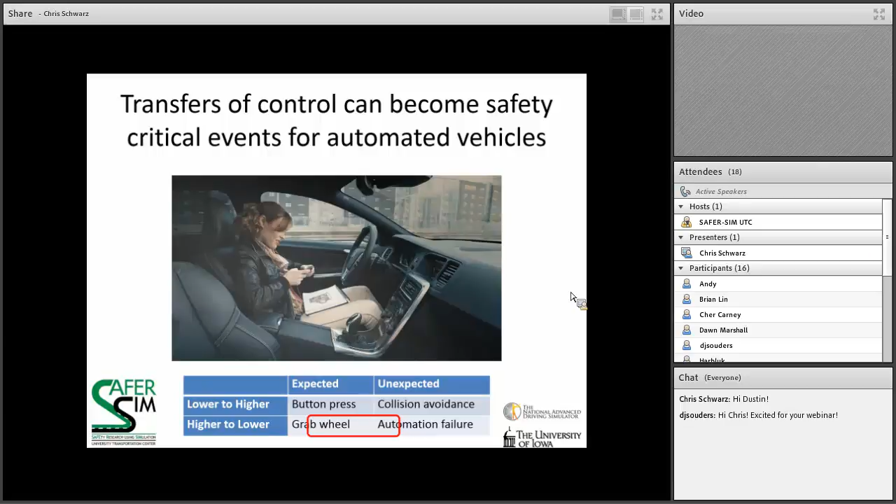It doesn't go back to an automation system, which would happen in level 4. In level 4, the automation would be expected to safely pull over or slow down or do something appropriate. In level 3 and in this study, it was really the driver who needed to take control and respond to a situation if he or she was asked to.

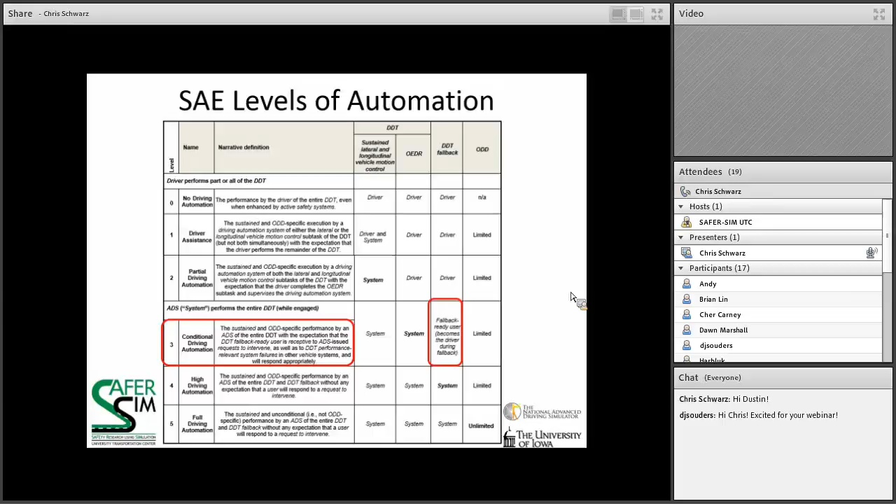When did they choose to begin a transfer of control? How long did it take? How long did it take to return control to the automation after the event? How long did it take the driver to really stabilize the vehicle after a transfer of control and return their attention to the road? Were there any performance decrements associated with transfers? And were there any differences in the gender and age groups, either in their trust or their driving performance?

So that's a lot to chew on. And if it feels like this is kind of an ambitious project, it's because there was an exploratory aspect to this study.

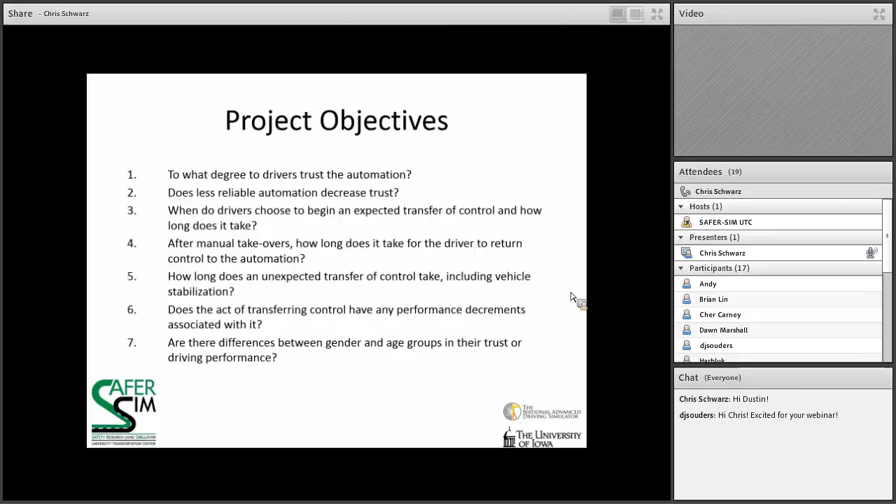Part of the reason for that is it's really the first NADS-1 simulator study that we've done with automated vehicle technology and giving drivers exposure to that. So there was an exploratory nature to it, and we were kind of curious to see what would come out of it. And some of it was inspired by previous work in this area that I'll mention during the talk. And so, all right.

We had 5 main events during the drive. 4 of them were events that had to be responded to either by the driver or by the automation for the drive to continue. And then the 5th was a normal exiting the highway at the end of the person's drive. So a work zone, missing lane lines, sharp curve. Really, it was an elevated exit ramp that had little walls on it. It was a fairly sharp curve, a slow lead vehicle, and then exiting the highway.

Now, in the condition that had more capable automation, it did not issue takeover requests for several of these. Rather, it just did what it needed to do, changed lanes or kept on going through the missing lane lines, for instance. And in the slow lead vehicle, it issued a 10-second takeover request, and in the exiting the highway, it issued a 30-second takeover request. In the less capable condition, each event issued takeover requests, and the slow lead vehicle was more critical with only a 5-second warning.

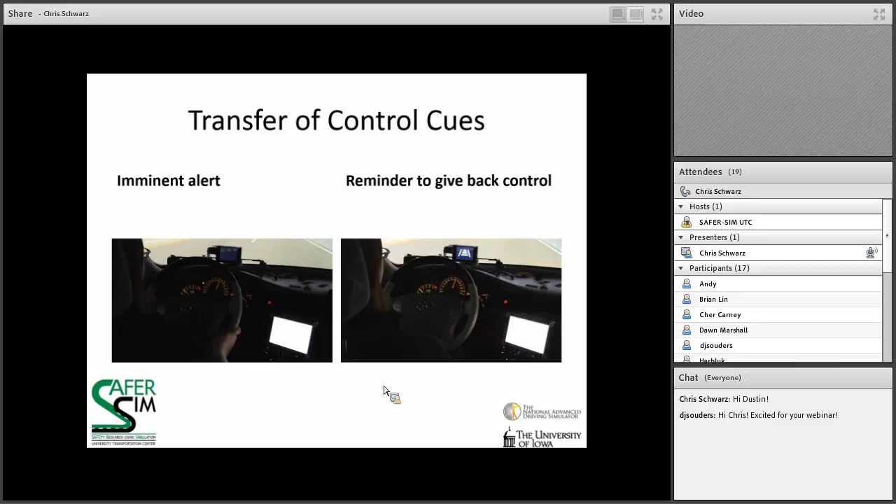All right. The apparatus was the NADS-1. If you're not familiar, it's a large motion-based full motion simulator with a full vehicle cab in it, 360-degree surround visuals. The motion base is about 20 meters by 20 meters. So you're really able to do some good turning and braking in it. As well, it has vertical vibration.

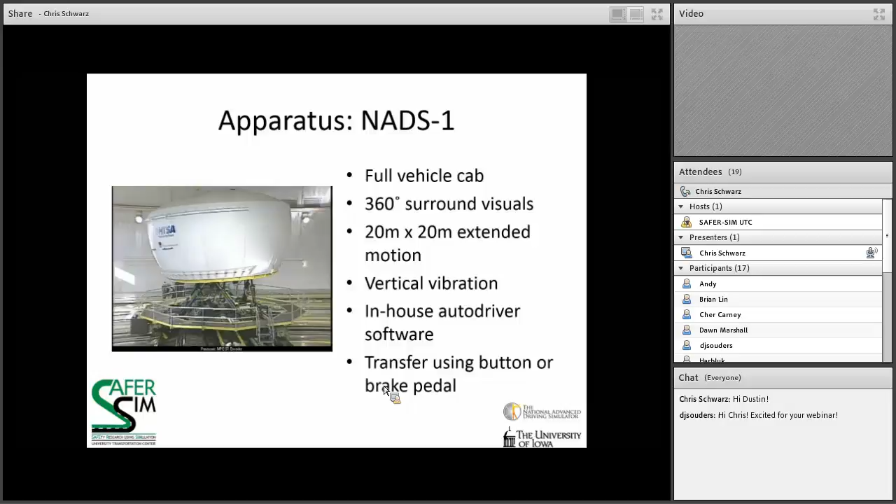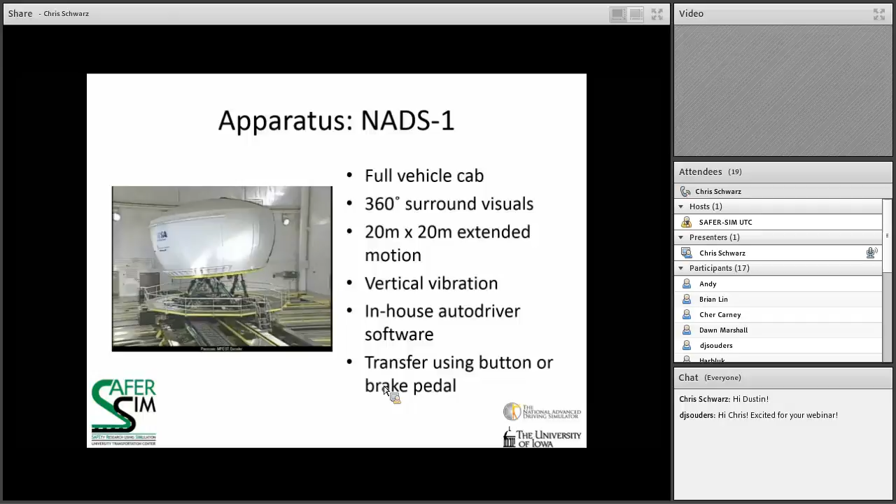We developed software in-house to do automated driving control that was capable of doing lane changes, exiting highways, merging onto highways, doing turns, slowing down at a stop line. And you've already seen how we did transfer of control. We had that button on the steering wheel, and you could press the brake pedal.

The task was a trivia game that they could access from the iPad. And they had a choice to do any category they wanted. So the hope was that the level of interest in the task was similar across the subject pool. And the task itself, of course, was fixed. So we really wanted to try to standardize the level of engagement and workload as much as we could.

It's important to realize that this is not a secondary task for these drivers. Once they put the car into automated mode, it becomes their primary task. And paying attention to the road is then a distraction to them.

Okay, some of the measures and analysis techniques that we used in this study. Our independent measures were the order in which we presented the two types of automation. They had two study drives or two scenarios that they experienced. And each one had the same events in different orders, and it had a different capability of automation. And as well, we controlled for gender and age.

And then we looked at several dependent measures, including the duration of the event and how long they spent in manual control, response times for them to take over, take back control, and then give control back to the automation. We looked at their gaze and measured the PRC, the percent road-centered gaze, which is just the percentage of time they spent looking at the road.

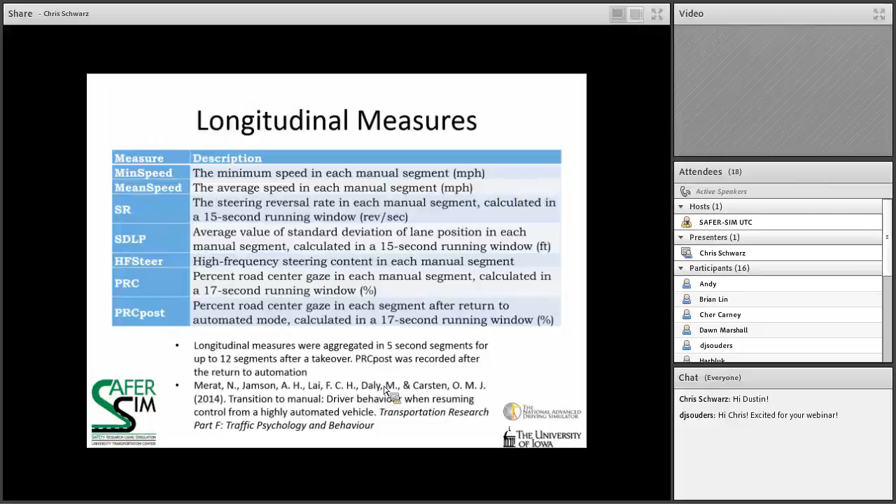We looked at speed, steering reversals, SDLP, high frequency steering, and the PRC gaze. And then we also looked at the PRC gaze after they gave control back to the automation. So we were able to see how quickly drivers went back to their trivia task.

We used SAS to analyze the post-drive survey data. We used R for everything else that was in the simulator data. We ran ANOVAs for several of these, applying Box-Cox transformations where appropriate to achieve a normal distribution of the residuals. And then we made extensive use of linear mixed effects regression. And we used the lme4 package in R, which was really great.

And the interesting thing that we did was when you use time as a factor in the mixed effects regression, then you get what's known as a growth curve analysis. And you can do some really clever things, treating time linearly or quadratically or polynomially. And I'll show you in the results what you actually see when you do that.

In terms of accuracy measures on the linear mixed effects regression, well, the relative accuracy is traditionally done by something like an AIC or a BIC, and we reported both of those in the report. Absolute accuracy, you might normally turn to p-values, but the lme4 toolbox doesn't report p-values, which may be problematic to some people. Instead, I used another approach that is documented in the report.

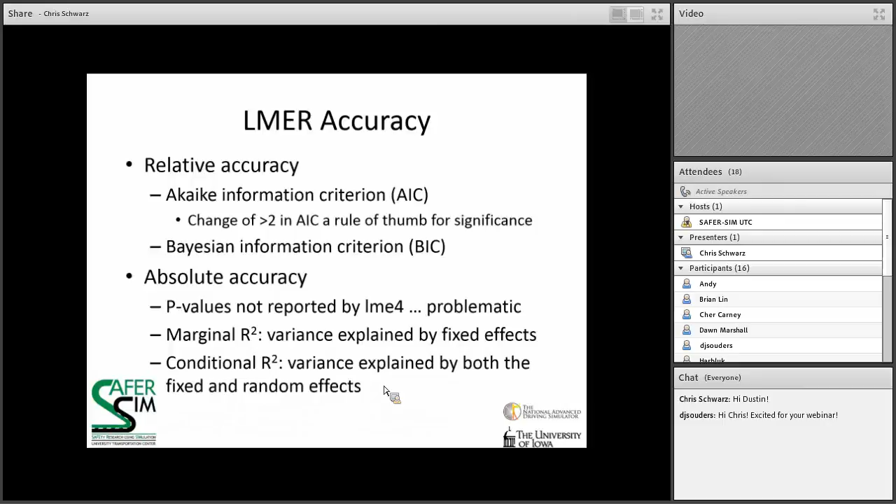You can estimate marginal R-squared values that explain the fixed effects, and then conditional R-squared values that explain the combination of the fixed and random effects. So that's what's reported in the results. But don't worry, I'm not going to show you tables and tables of numbers today.

So here's some results on trust, and I'm going to show you a little video of the Likert survey. I'm going to try. There we go.

So you can see that survey was placed near the center console. It is not that high. So really, if they're involved in their trivia task while they're doing this, there's no need to even look up at the road. They can just glance over at the screen, press their response, and go back to what they were doing.

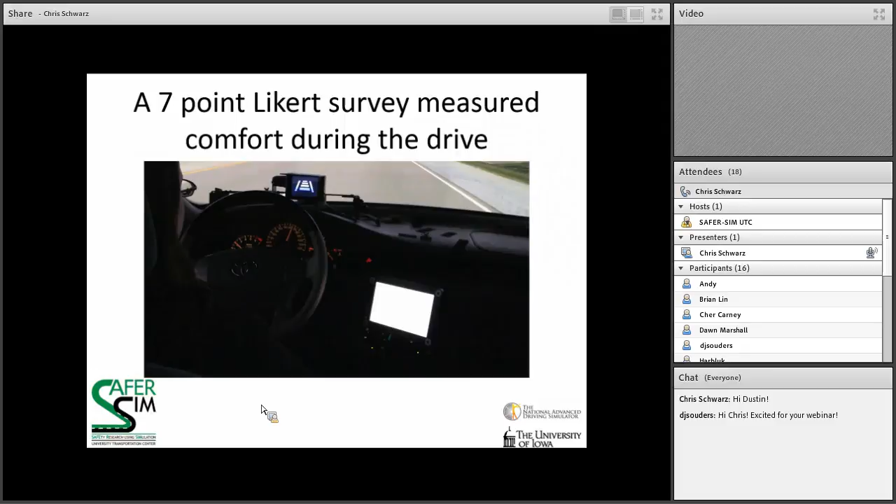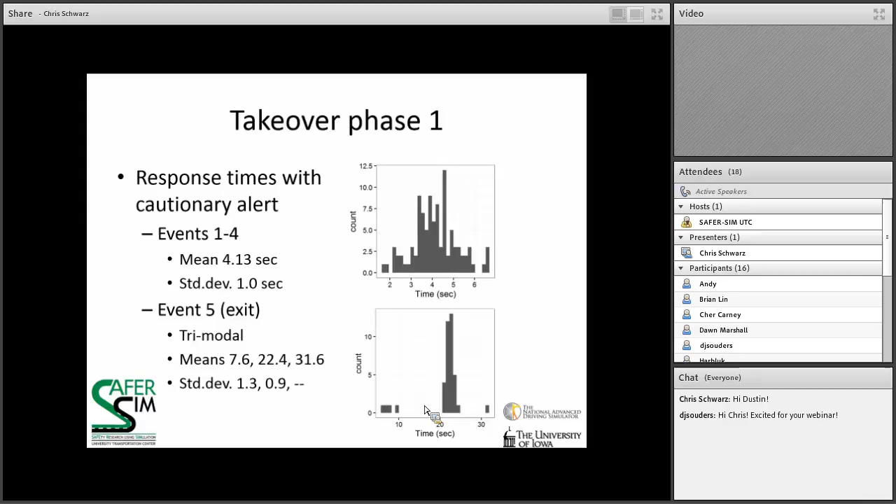It was thought in that work that perhaps one of the reasons that people were waiting into the second stage was that their takeover request actually had a countdown where it would count down literally to the time of the next stage. And ours did not, but we still have this trimodal distribution here. It's kind of interesting. This also echoes, I think, previous work that shows that people can take over really fairly quickly. And if there were a safety critical event that they really had to respond to, people could probably take over even faster.

But looking at phase 2, where people then have to take control of the vehicle and stabilize it, we looked at SDLP and this high frequency steering measure. And the interesting thing here is that you can see in the first 6 segments of time, this is a longitudinal measure. So each instance at the bottom is a 5-second period of time.

Can you give me some water?

And this is showing that really for about 30 seconds, and this is aggregated across all subjects. So you're going to see individual differences, but really for up to the first 30 seconds after you take back control, the standard error was quite a bit broader. And I think that's kind of interesting.

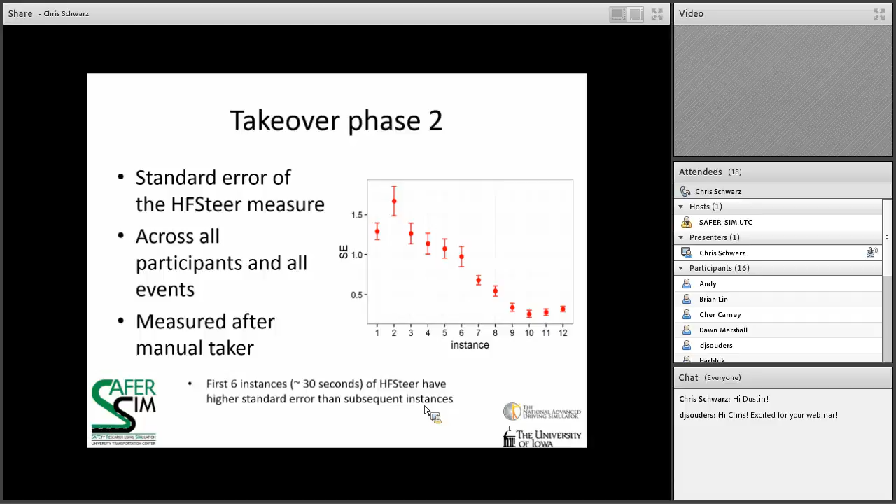And then takeover phase 3 had to do with visual attention and the percent road center gaze. And what actually happened is that some people's gaze never really returned to normal after a manual takeover. So we fit a line to the trend as it was increasing and extrapolated if we needed to find the time that PRC would reach 70%, which is about in the normal range. PRC, if it goes too high, like 85, 90%, then you're actually in the range where we associate that with some cognitive distraction, gaze concentration. So 70% is about right.

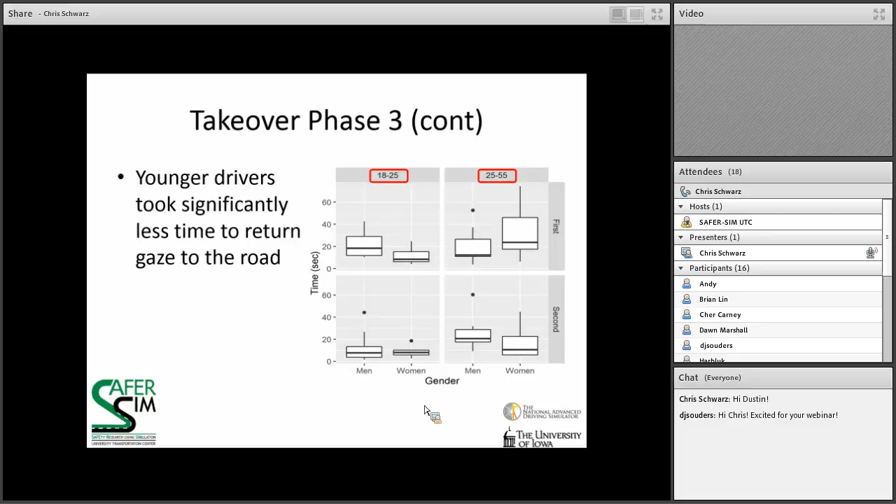And so we're seeing some numbers that go, you know, up to 20, even up to 40 seconds. There was a result here where we can see that younger drivers took significantly less time to return their gaze to the road. So they were able to switch their context more quickly from the task back to the driving.

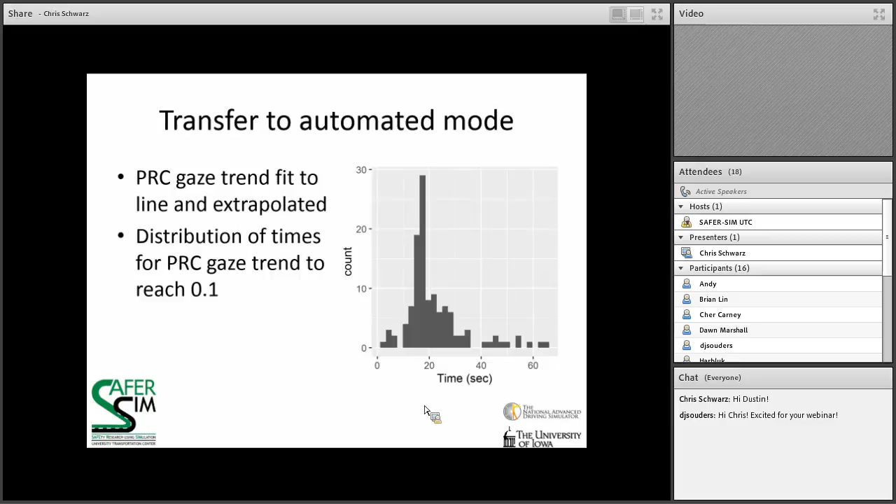And then returning back to automated mode, we did exactly the same thing, only we were looking for the time it took the PRC to drop to 10%. And here again, younger drivers took much less time to switch back from driving to the trivia task. And interestingly, older females took the longest to reallocate their attention, but only on the first drive. They adapted after that. And in their second drive, they took much less time.

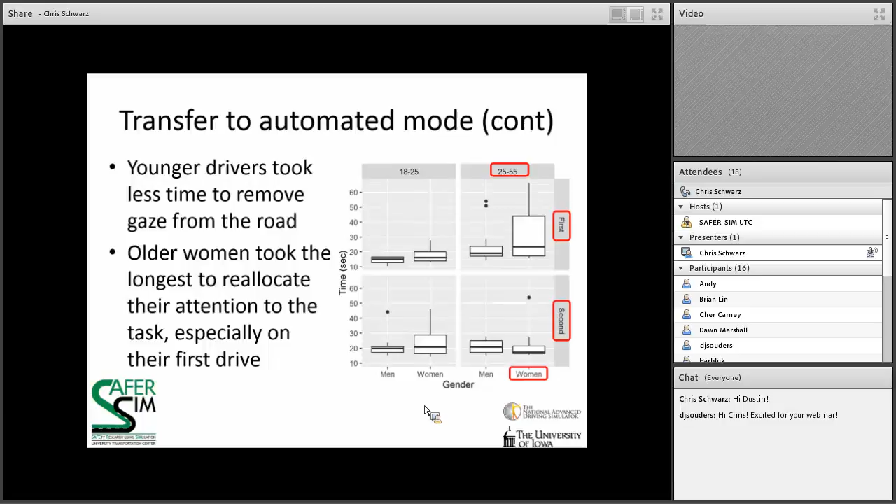I'm going to spend the remainder of the results slides on focusing on the lead vehicle event. In the report, you'll also find some results on some of the other events, but I think the remarkable thing is that the lead vehicle event really had quite a few results associated with it. Perhaps because it was maybe the closest thing we had to a safety critical event, where you were coming up on this truck that was driving at about 25 miles an hour. And it was the one where, in the less capable condition, we issued only a 5-second takeover request.

So, first of all, time spent in manual mode. This is the time from when they took back control to the time that they gave control back to the automation. In the condition with the less capable automation, so that would be the one where they had the 5-second takeover request, there was a difference in age, and there was also a difference in gender that we saw. Younger drivers spent much less time in manual mode than the older age group. I say older, but it's 25 to 55, so I'm getting up on the high end of that. Men spent less time in manual mode than women did. So some of the interesting results that we got out of this study really had to do with gender and age differences.

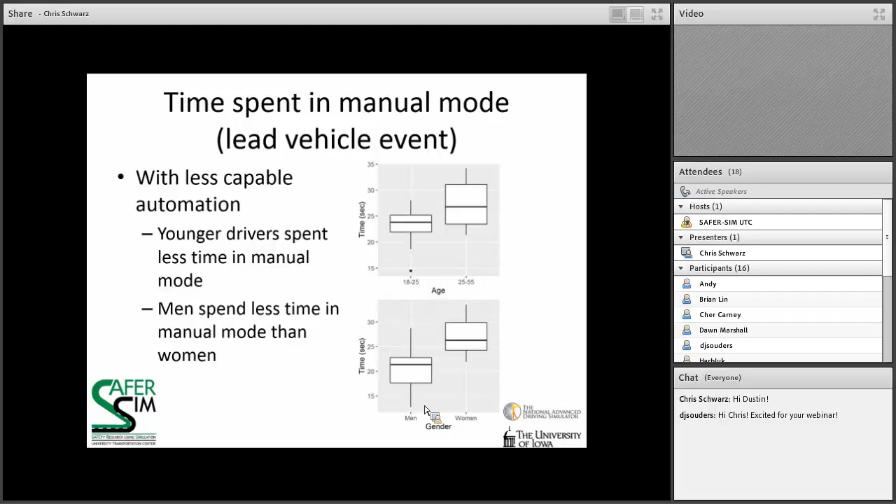Minimum speed. This is the first slide that shows some of the results from the linear mixed effects regression. So let me take just a moment to explain what's going on. On the left, you're seeing a caterpillar plot that shows confidence intervals associated with each term of the mixed effects regression. So if it were purely a linear fit, there would be an intercept and a slope, basically. But this was a little bit more complicated. I believe I did polynomial time for all of these, so time itself could have a linear component and a quadratic component. So the fit over on the right, if you look at the red lines with the gray bars as the confidence region about those lines, you're seeing the fixed effects polynomial time, so it can look quadratic or it can look linear.

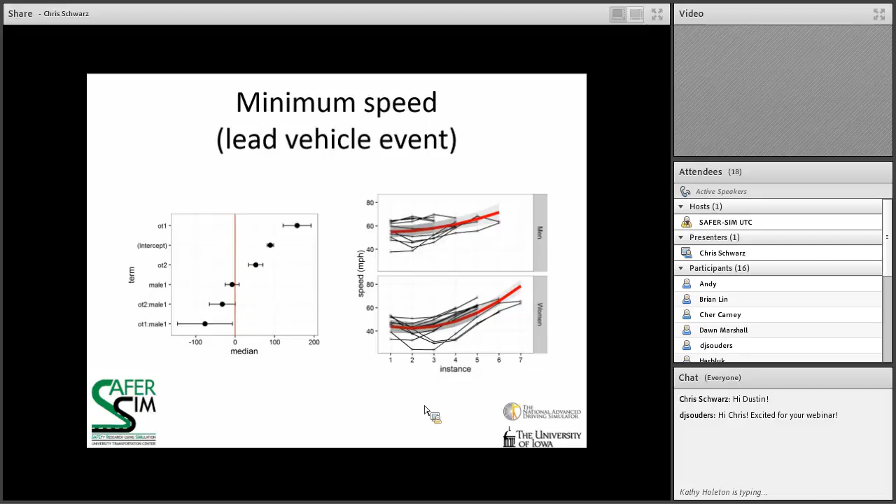And the differences in those red lines are the differences between the two groups. Back over to the left, what you're looking for is the confidence intervals to be outside of 0 and not include the red line at 0. And if that's the case, then you can surmise some kind of significance. And because we see that with gender, I'm showing the differences between the gender groups on the right. And indeed, you can see that the women had a lower minimum speed, quite a bit lower on average than the men did in that event.

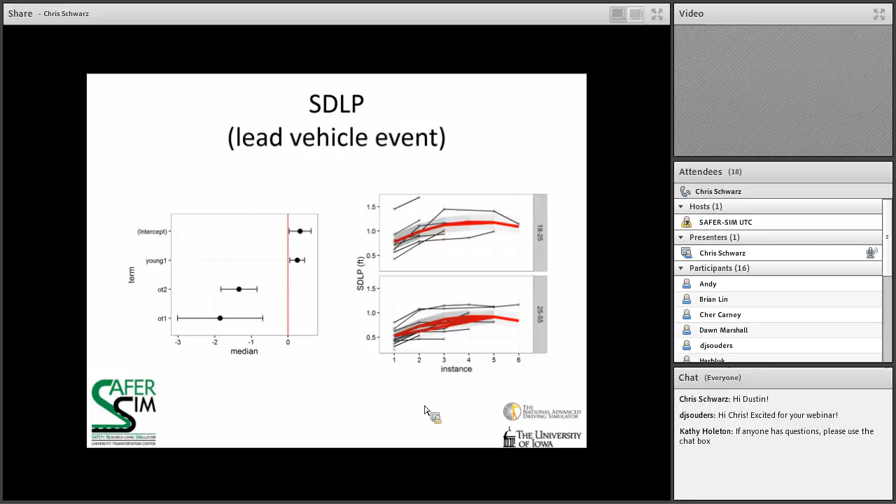And then this result is interesting in that it's focused on the first drive versus the second drive. It's not a result on age or gender. And there were other results like this that I'm not showing you, but you can find them in the report. So this is showing that in the first drive, the high frequency steering has more of this linear look to it, and perhaps is, well, it's a little hard to tell because you can see that there are a couple of people who might be considered outliers. And if you took those two folks out, then that might make the behavior look more similar.

But on average, there's quite a bit of a difference in how people steered during the first drive as compared to the second drive, which would suggest a link to the change in comfort as they became familiar with the system. So it wasn't necessarily associated with the capability of the automation, because some got one and some got the other. And it wasn't necessarily linked to the order that those were presented, just merely by virtue of the fact that it's their first drive or their second drive.

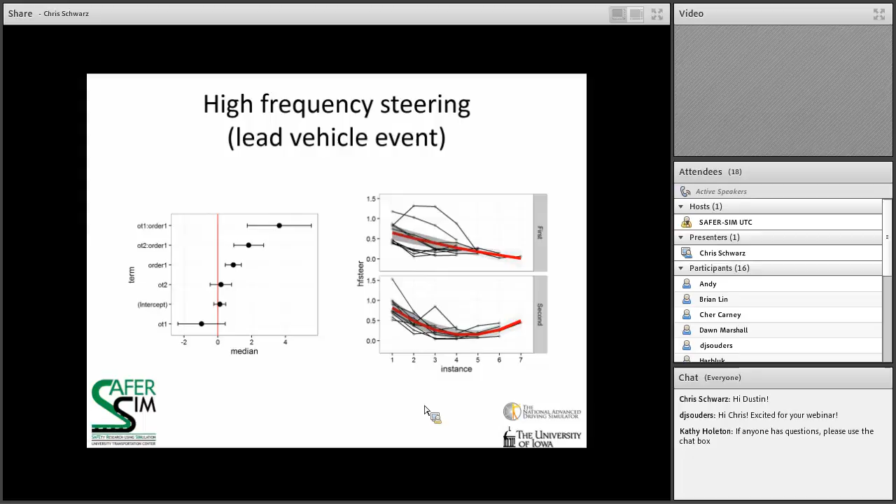All right, let me conclude and then we can move on to some questions. So, again, excuse me, one moment.

We considered trust through the fairly narrow window of comfort, because we surmised that comfort would be a good indicator of a driver's nascent trust in a system that was unfamiliar to them, as this system certainly was. The first thing that you have to do is become comfortable with the system as you learn it. Beyond that, you can start to learn more about the system and its limitations and develop a good mental model of it.

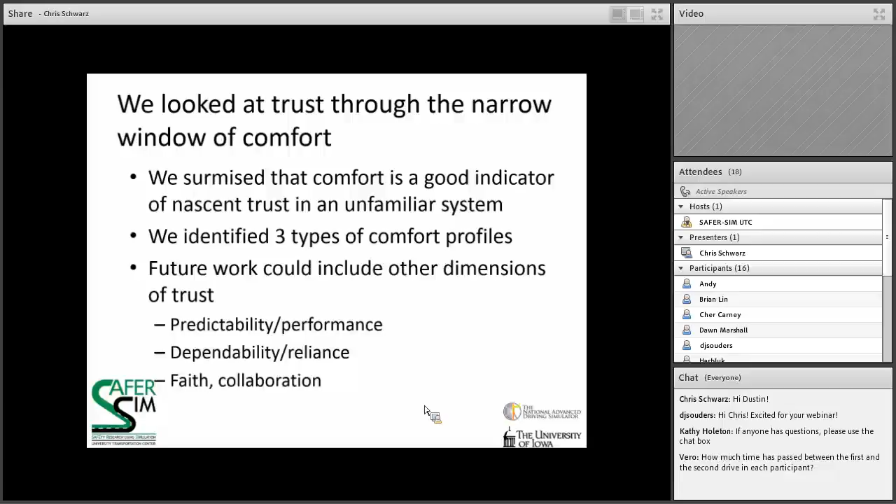But really, I don't think that we gave drivers enough time to do all of that. We did give them enough time, though, to become comfortable with the system. We identified 3 types of comfort profiles. And what we can do now in future work is to start to bring in other dimensions of trust. Some of these have been documented in other work: things like predictability and performance, or dependability and reliance, faith in the automation, and collaboration with the automation. These are all aspects of trust.

So we varied reliability by giving people 2 different capabilities of the automation and having it change on them from the first drive to the second drive. But it was interesting that we don't have many results that show an effect of changing the capability of the automation. We did see some results that show that the first drive is different than the second drive. And so one of the reasons that maybe we didn't see as much of an effect of changing the capability of the automation was that they weren't all that different.

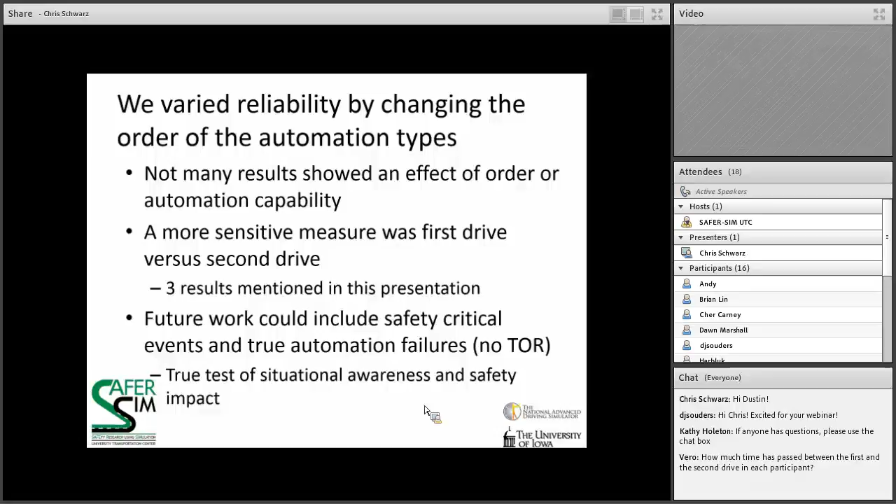And we didn't put people in truly critical situations either. So one of the things that we could have done was to introduce more safety critical events. We could have also introduced what I would consider true automation failures. In a real failure, you would have a situation where you need to intervene, but the automation isn't even on top of things enough to issue a takeover request. So you have to notice it yourself and take over control. That, to me, would be a real failure of the automation, and it would be a true test of that driver's situational awareness. But we didn't go to that extent in this study.

Now, we did see that takeover timing was quite a bit different. There was individual variation that you could see in the distribution, but it varied greatly by phase, where physical takeovers would take about 4 seconds. The high frequency steering would show a period of stabilization after takeovers, and then visual attention would have to return to normal. Now, the concerning thing about all this is that phase 2 and phase 3 happened after the takeover. So the driver had control and then needed to complete the process of regaining their situational awareness.

And so that's why one of our conclusions from this work, and it echoes previous studies that have been done, is that there's a window of time after a physical takeover where we would surmise that drivers might be at higher risk, because they're still in the process of stabilizing and regaining their situational awareness.

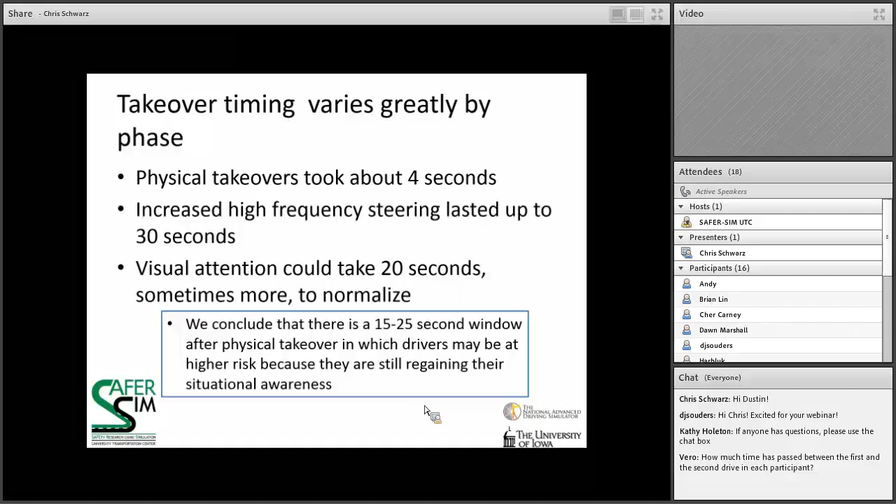So there are several open questions that remain that we would love to take a look at in future research. One would be: we've identified this vulnerable window of time after takeovers, but really, what's the safety impact of that? Just because I'm showing you that the high frequency steering is greater for up to 30 seconds, what does that mean in terms of safety? The answer is I don't really know yet. How do other dimensions of trust factor into drivers' expectations about the automation and their responses?

Why didn't we see more effects of varying the automation capability? And how much would we have had to change it in order to see an effect? I don't know the answer to that right now. And how could we use some of these results to design an automation system that would quickly engender trust, that could perhaps use information from a driver monitoring system to design an effective HMI? So there are all kinds of interesting questions.

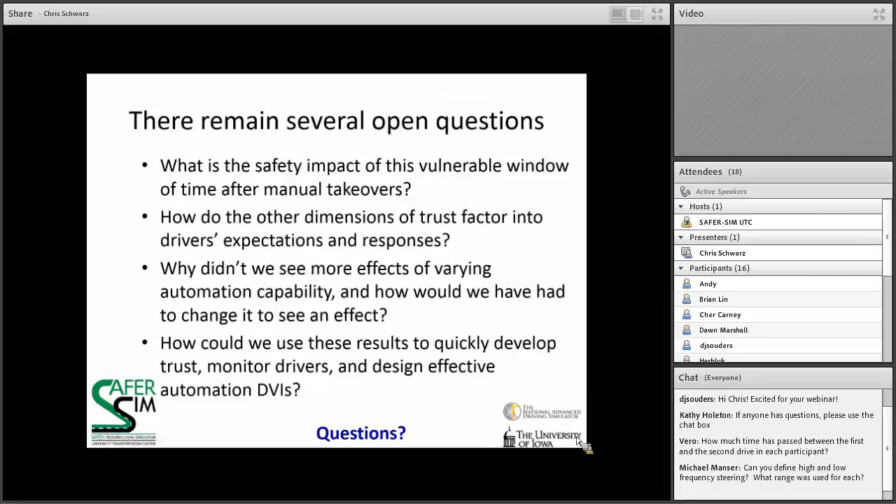And I have seen some questions flow through the chat, so let me bring up that chat and see if I can address some of those. Do I have to escape? Yep. Okay. Okay.

Can you define high and low frequency steering? Yes, I will do my best. That measure was also adapted from the Leeds work, the 2014 paper from Natasha. And basically, you're looking at two frequency bands of steering. The low frequency is, I'm not sure if I'll remember the numbers, but it's maybe 0.3 to 0.6 hertz or something. And the high frequency band is 0.6 to 1.5 maybe.

Again, I might be wrong on the numbers, but you can use a power spectral density to get the density of steering in each of those bands, and then you take the ratio of high frequency to low frequency. And the idea is that if that high frequency steering measure is larger, then that is an indication that the driver could be distracted in some way.

How much time has passed between the first and the second drive in each participant? Not much time, only a couple of minutes, enough time for them to take a couple of surveys, the simulator sickness questionnaire, and the trust survey. So maybe 3 to 4 or 5 minutes. Great. Other questions?